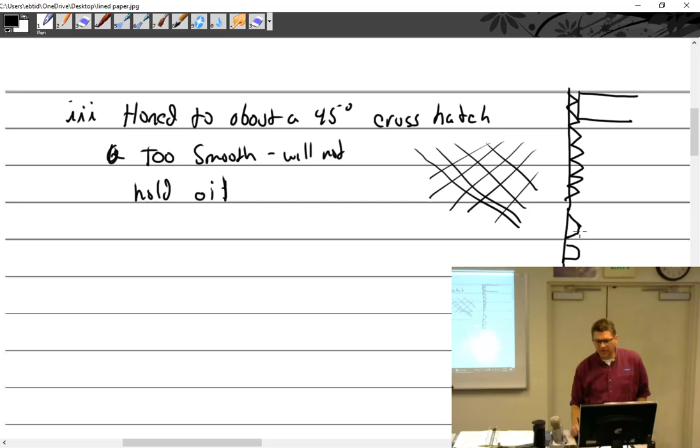That little cross-hatching is going to hold oil. And it holds just enough oil. But if you don't have a good break-in, the oil actually comes out and creates a film over everything, and then the ring just rides up and down on this super slick film of coked oil, and you don't get seating.

Then it becomes too smooth, and it doesn't want to hold any oil, or oil can get through, so you start burning oil and having problems.

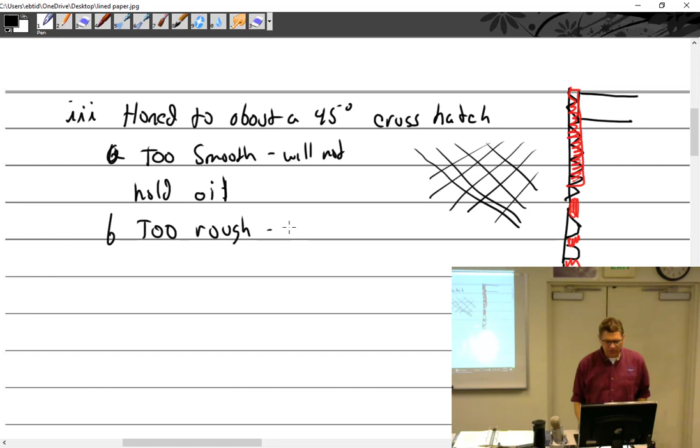If it is too rough, so if too smooth is bad, how about too rough? Is rough good? No, it causes extra wear, causes excessive wear, and that's bad.

I don't know why this is a 4, cylinder.

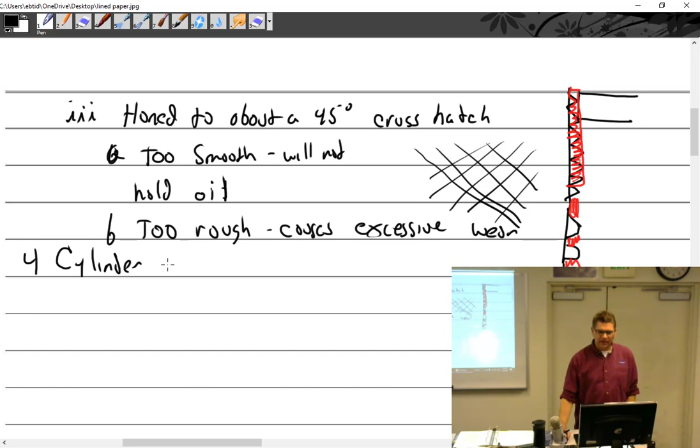It's kind of interesting that a lot of you really have read, which is impressive, and I can't say enough about this class. That other class, they suck compared to you guys. Tell them I said that. No, they were a good class too, they made all the engines nice and pretty and actually in pretty good shape. But you guys are the class that really reads a lot and is well prepared.

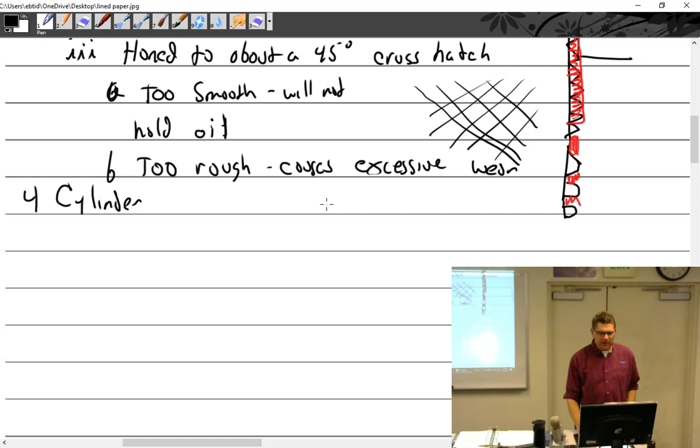If you read about where to measure these cylinders, according to Lycoming, we'll look at the bore upside down, here's the skirt coming down. Where am I supposed to actually be measuring? What does it say in there? It says to measure it about 4 inches down.

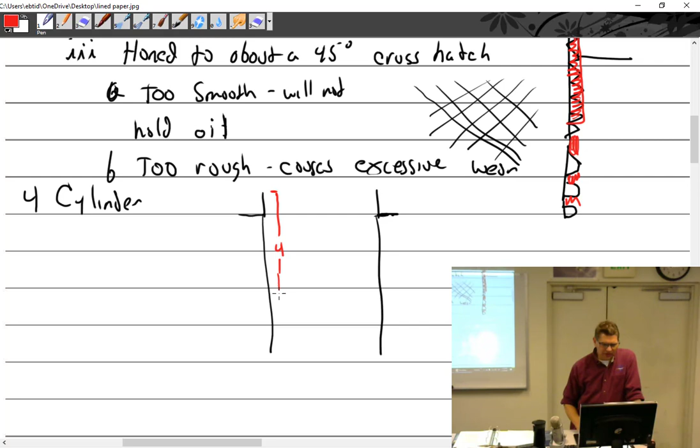Okay, and then you're supposed to measure the choke 2 inches up. Let's make this more realistic, since it's more like this. So 4 inches down, that's about 4 inches, and it says to measure this 2 inches. Now, from here to here is about 6 1/8 inch, so that means 2 inches up would be right about here. Yeah, so there's 2 inches.

So do you really think that you want to measure 4 inches down to this spot and 2 inches up to this spot? Okay, that doesn't sound right. I mean, that's what the book says, so I just got to tell you, you got to do what the book says. But in reality...

I like to take my initial measurement right here, and then compare that with, okay, 4 inches down is fine, but you have the bore gauge now, right? You know how to use it, and you can see how quick it is. So I like to take measurements right about here, and then another 4 inches down, so I can get a good view of what my bore looks like.

Okay, there's nothing wrong with taking extra measurements at all. You're never gonna get in trouble with 'well, I thought you were only supposed to go 4 down, what do you mean you got extra measurements, you're extra careful, we can't have any of that.' No, you can do that all day long.

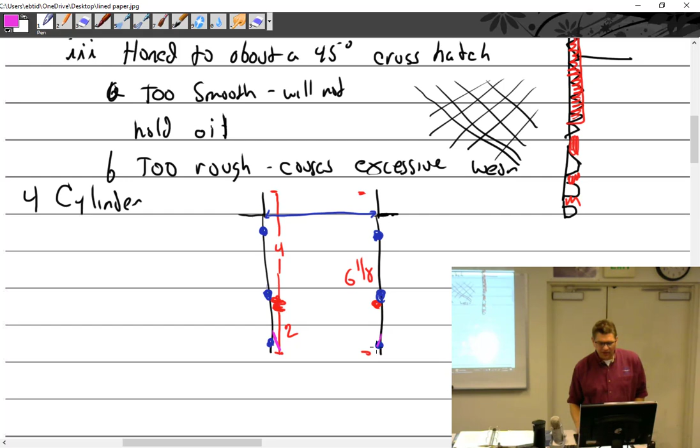So number 1, I've got my measurement up here where I like to see it. 2, I've got this measurement here, which is really about 4 inches down anyway. And then I take my choke measurements right down here, because when it chokes, too much stuff on here, it really chokes down here at the last little bit. It doesn't do me any good to try and measure choke above that. I want to measure my choke where it's really choking down.

And the reason why I really understand this is, I told you about my really cool hone machine. I wish I could even find a picture online, but I can't find one.

In order to hone cylinders, we had this thing called a sine bar. It was really just a piece of steel, about yay big, and we would literally pull it out of the machine and change it out for whatever cylinder it was. They were labeled, like this one is for a Lycoming, and it would have the choke, a 10,000ths choke, or Lycoming 4,000ths choke.

So when you held up the sine bar, it was really just a profile of exactly what the cylinder looked like, but exaggerated. There was this little wheel that would follow it on the machine and adjust the pressure, so you could get a great representation of what the cylinder looked like. These sine bars were absolutely straight until the last little bit, when they would pop in, so they'd look just like this.

They had a little hook on it, where they went in the machine. So the wheel for the machine would roll up and down this, and when it got to this spot right here, it would release the pressure on the stones that were honing it, so it would choke it in. It's okay if you don't understand that.

But my point is, I want to measure down here, I want to measure this part right here. I want to know, for the same reason, what that choke is, because I don't want to be surprised that it was choked too much. The wear sometimes comes right down here at the last little bit and really gets a lot of wear right here. So if I'm measuring above the major wear part, I have no idea what's going on.

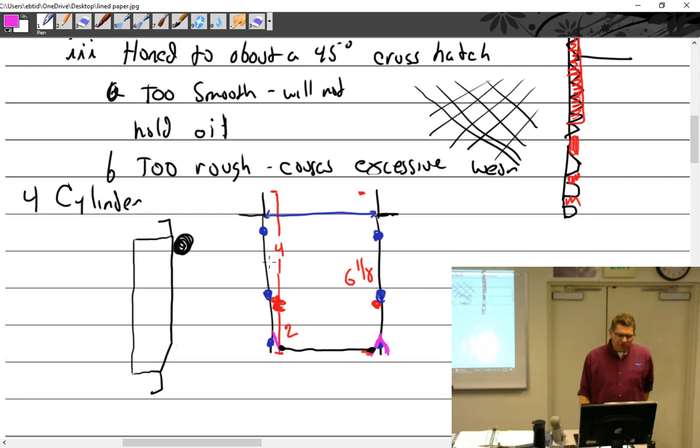It really wears a lot, that last little half of an inch. And this bore thing is critical. You want to hear a story? You gonna be okay with this, MJ?

Yeah, okay. So there's different machines and how they bore cylinders over. Some of them have a rotating wheel, like a grinder wheel that goes in a machine and kind of goes around and rotates. The way our machine worked is you put it on, you do one at a time, and it had a head that was just the same size as the piston that would go in there.

We had to change out the heads depending on the job. It had 6 stones, 6 to 8 stones that would go all the way around the perimeter, and this ram would come up and press the stones out. The stones are only about that big around, they weren't real big stones. So the machine would go up and down and spin and put the crosshatch.

To hone it out, you just let it run longer. It wasn't like I would program the machine and say I want to go 10 over. I would simply set it, and you'd have a counter on it, so you could set it for like 100 strokes or 50 strokes. It would run through all of its strokes, and you'd take it off and measure it, see where you are, put it back on, do some more. Maybe I go 400, 500, 600 strokes, but I do 100 at a time and check it, because if you overbore it, you just throw it away and get another one.

That's bad. So the procedure was, now when you're boring it, it's going to get warm, right? And what happens when the cylinder gets warm? It expands everywhere, and it expands at the head even more. So you really want to keep this profile right. That was the procedure, and my procedure was very simple, because of the story I'm going to tell you.

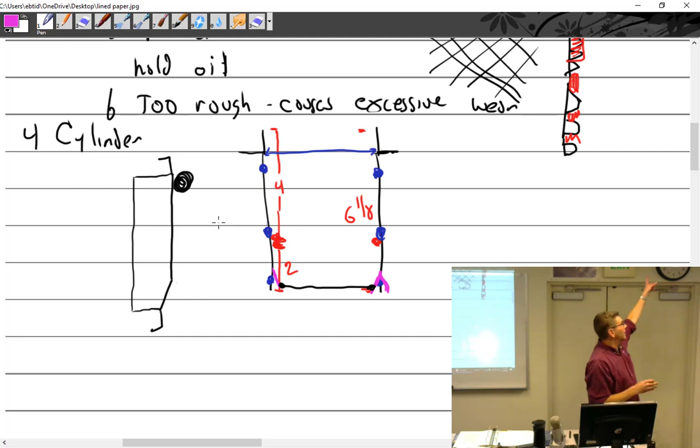So the pilot has smoke on. And it's non-controlled, we don't have a radio, we can't tell him he's got to do an emergency landing. He was heading to executive. He made it - I'll just tell you, he made it. So we're just watching the smoke, and Clarksburg is inside the Class D airspace, so it's 4 or 5 miles there.

He's smoking the whole way, and we can't see him anymore, so we're on the phone right away. The pilot tells the story - new cylinders, new everything. He's watching, he goes, wow, he can see these temperatures just spiking, and it freaks him out. He didn't want to come in and land on the grass runway again, so he's making it towards - you know what this is by chance? I don't remember who it is anymore.

So he's headed toward executive, and he called in an emergency. They gave him a straight-in approach. It's not that far. As he's getting close, he said all the temperatures just spiked out, and the power is going away. The engine's seizing up on him. So he landed, and they towed it in.

The next morning, I went with that mechanic to take the engine apart. The way we had to take it apart was just brutal. We'd have to find a cylinder near bottom dead center, undo all the cylinders, and both of us would pull on the prop to move that cylinder off the case. Then we'd put 2x4s behind it and back the prop up, using it like a wrench to get the pistons out. It just destroyed everything.

It was just an aluminum mess. That's what 4 thousandths will do to your cylinder. That's all it was, 4 thousandths. How much is 4 thousandths? That much, it's off by that much. And it ate up that thing.

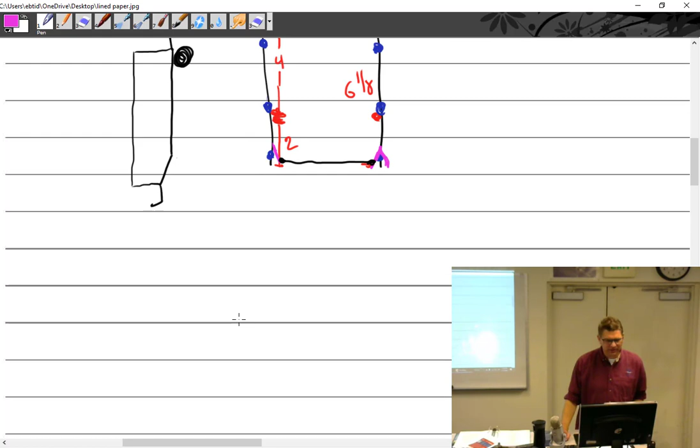So what is my point? Nobody even knows. My point was, because I wrote 'cylinder,' and I was going to write cylinder wear. Cylinder wear is most near the head, due to heat and pressure.

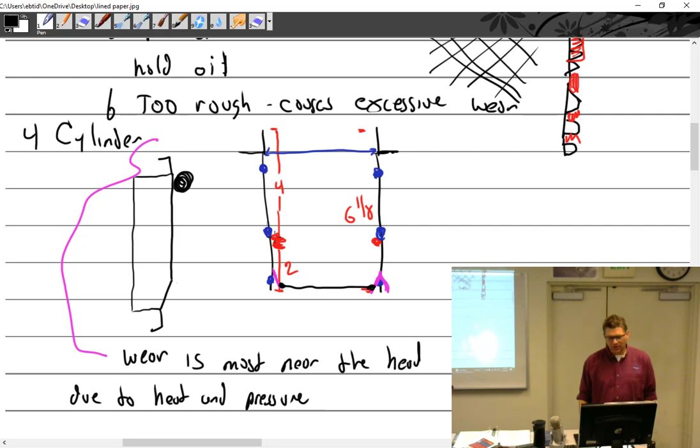So my point was, don't measure your cylinder way down here at the 2-inch mark. Measure it up here where you see the actual wear. This is a great cylinder example, and you can see where the wear is on this one. If you look, there's this little ring that's only about 3/16 of an inch down. This is real, and you can see all that wear right there.

Or you can look right there. The chrome is... actually, let me take that back. Let's look at it this way. You have a line of chrome that's about 3/16, and then right on the other side, the chrome has worn out. So right here and right over here, you can see there's not even any chrome. If you run your finger down it, you're going to feel it right about here. In fact, if you look, there's no more cracks there — all the cracks have been worn through.

So now I'm going to pass it out again. You look at that — that's where you should be measuring.

Steve's going to wipe my red pen off.

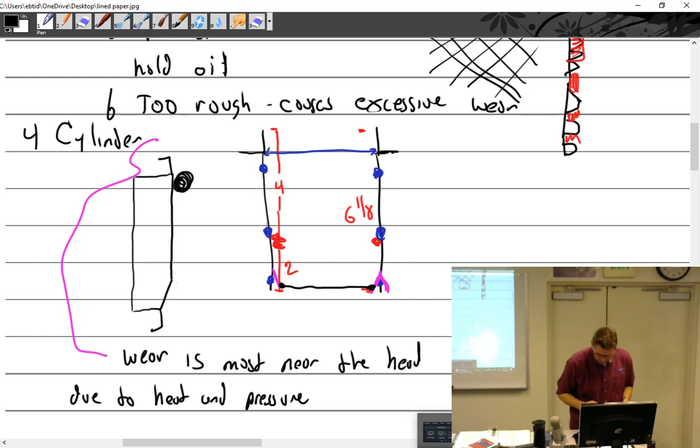So if I were going to be measuring this, I would want to measure right where my little red dots are. Exactly, right up here for the camera.

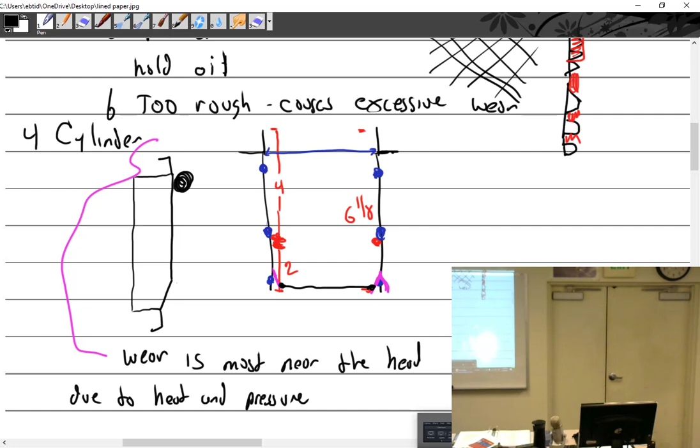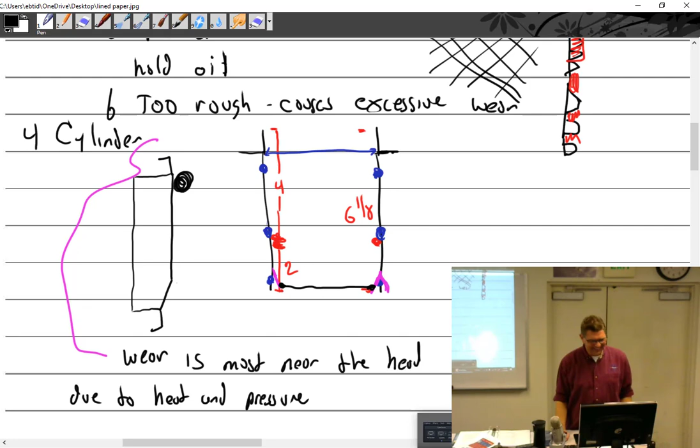See that, Katie? No. So anyway, that's what we do. Want to hear a funny Katie story? She's going to listen. She says, well, I got to go listen to one of Dad's sermons. She calls them my sermons. I love you, Kate. Did you make her walk home? It's a long walk. Yeah, oh, it's not that far. I'll pick her up in a couple miles.

Not that mean. All right, so we talked a lot about the cylinder barrel, right? That's the combustion chamber and all that. And you can take a look. How is the head and the barrel put together? Screwed. They're just screwed on.

One of the things I was taught, the first thing you do when you get a cylinder, right before you put it in the oven, is we would take a punch and punch a little notch in the head and a little notch in one of the fins on the barrel, because when you heat the cylinder up to where we're heating it, they'll twist. And if you twist that, that's not a good thing.

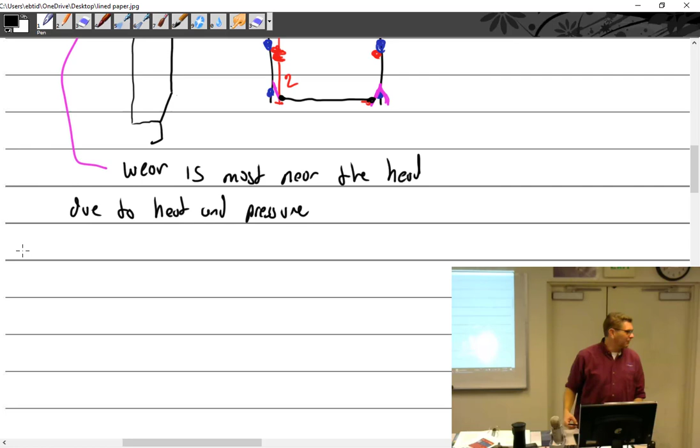You want them back the way they were, because think about it. Suddenly the head is going this way, then you got to get different push rods, and you have to get the angle. That's hard to do. Two-piece with a bearing in the middle.

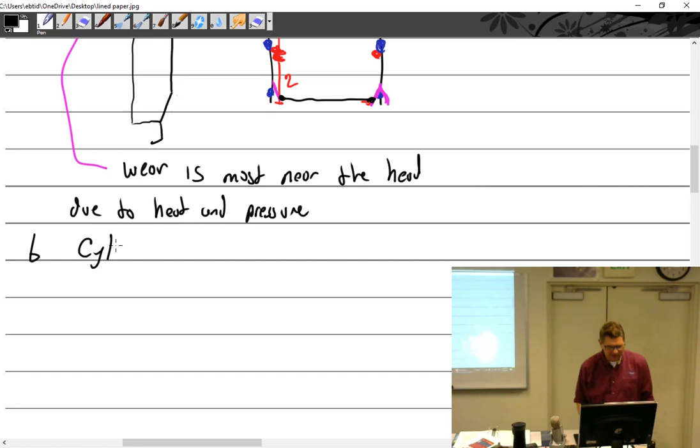Yeah, all right, so we're talking about the cylinder head. And why it's B, I don't know, just go with it. All right, so it's made of aluminum alloy.

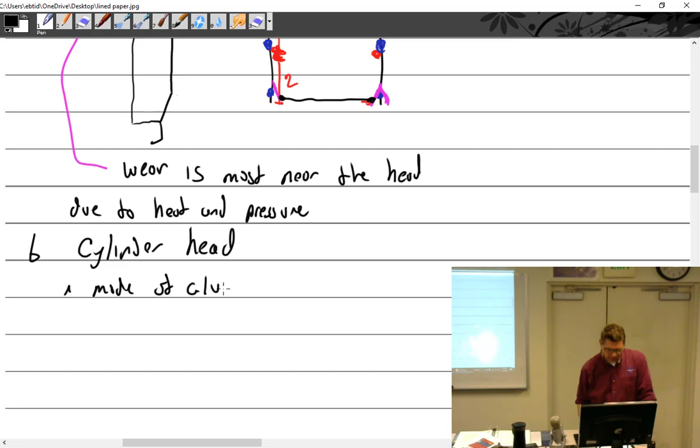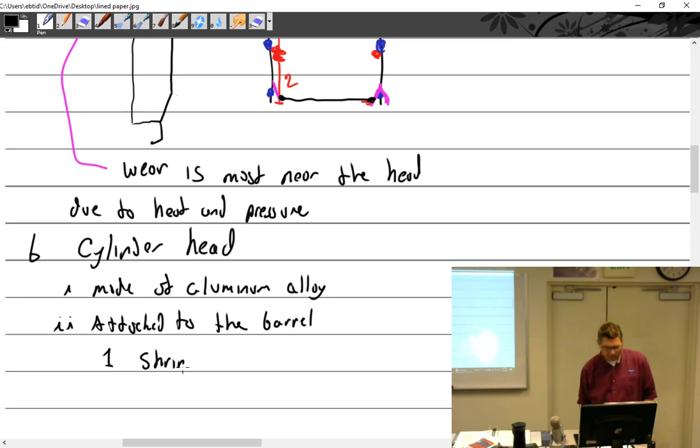It is attached to the barrel, and is done with one. It is shrink fit. What does shrink fit mean? One is heated up, one is cooled. So you put one in the oven and one in the freezer.

And you got to do it right, or they'll go together wrong. So which one goes in the oven, which one goes in the freezer? The inner goes in the freezer, the outer goes in the oven. Yes, the barrel goes in the freezer so it shrinks, the head goes in the oven so it expands. You put the two together, screw it together, and then when they both reach the same temperature, they're theoretically pretty well locked in place.

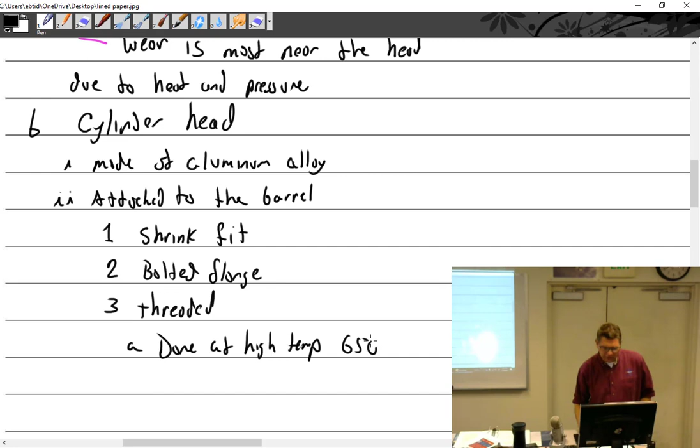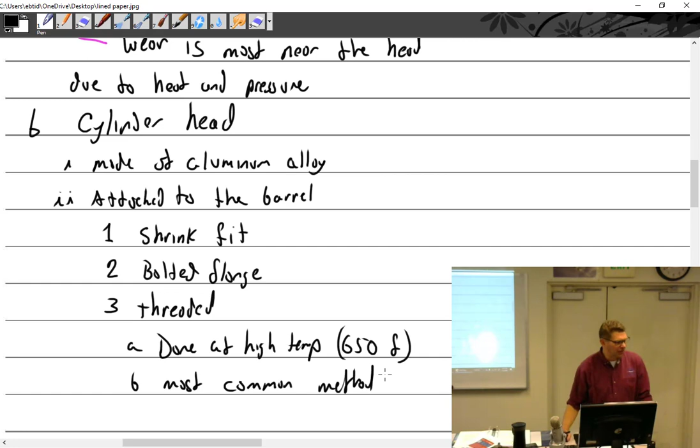Some shrink fit, some of them do have a bolted flange, not very many. Some radials, old-timey engines, are threaded. Done at high temp, 650 degrees is the number I have. And this is the most common, the threaded shrink fit.

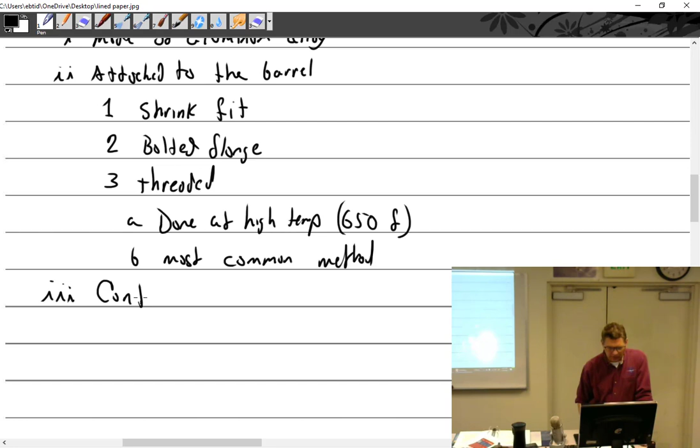Well, the head up there contains a whole lot of stuff that we have to talk about. Would you ever just change the barrel? Never, no, we were not certified to do that. Oh, okay, so you would think you could, and it would make sense, but you have to send it to some place, like I sent a lot of stuff to Gibson Cylinders. They're still in business, he's a good guy, I like talking with that guy. They specialize in doing the kind of stuff to cylinders that a lot of places don't.

Weld repair, so if the head is cracked, I think they'd unscrew them and go in, because it's too hard to weld. They would grind out the crack, re-weld, heat treat, screw it back together. And I think when you chrome plate, you have to separate the barrel to chrome plate it, you can't leave it together. So places like Gibson would do all that.

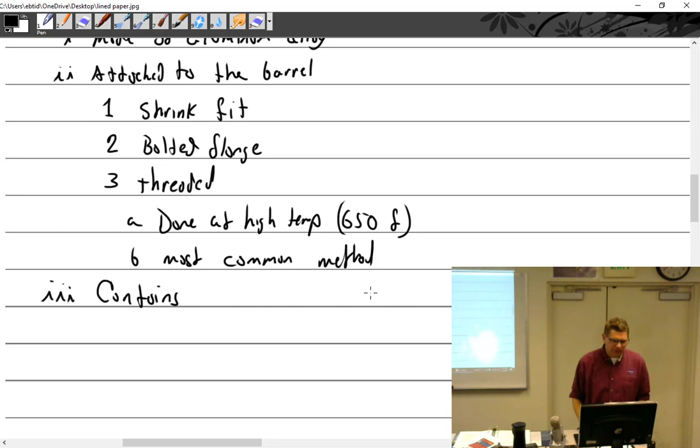How does one get a license to do that from the manufacturer? No, not at all, from the FAA. The manufacturer's not excited about you doing that, they don't like that, because they want to do it themselves, they want you to buy the new cylinders. So no, you go to the FAA and write policies and stuff like that.

Just like I told you, we could reface rocker arms, right? That's not an approved method, so how did I do it? You get engineering data, write a procedures manual, go to the FAA, and say I want to do this. They may have their engineer double check your engineering stuff and it goes through the chain. The engineer comes back and says that's not going to be a detriment to anybody, and so the FAA will stamp that procedure. Now you're legal to do it.

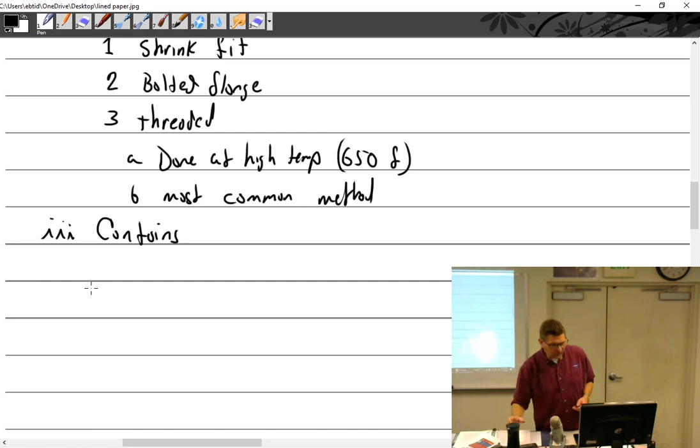So what happens if you approve it, the FAA approves it, it's put into service, and then there's a death? You're liable. But let's be realistic, in the real world the family is going to sue the engine manufacturer, the shop that did it, and the FAA for approving it. Gotta find the deep pockets. That's just the world we live in.

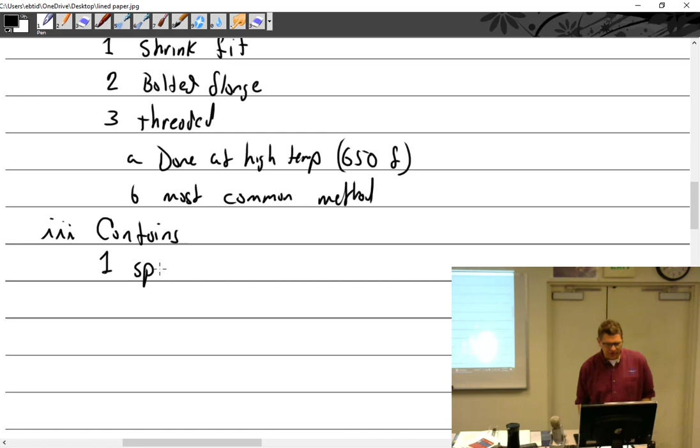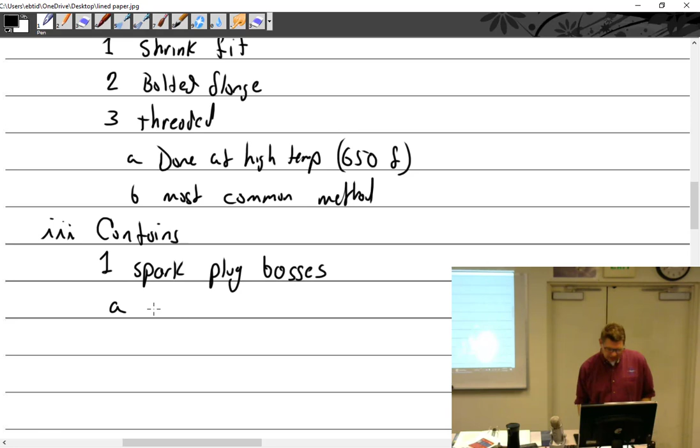What does it contain? It contains spark plug bosses. A boss is like a hole in something. They're either going to be 14 millimeter or 18 millimeter. Why in the heck is everything in the world not metric until we get to spark plugs?

Was it the Japanese? No, because NGK and all that, we'd have to go back to World War II, and I don't think we were buying a lot of spark plugs from Japan then. What, back to World War One? And who were we buying from? Europeans, right? The French? Did they come out? That would make sense.

I'm not sure exactly who it was, but in all actuality, we were making spark plugs, but we weren't very good at it. If you read a lot of history, it was kind of like, my grandfather was there, it was us and the French, us and the French. That's why half the stuff on the aircraft has French names - empennage, fuselage, ailerons - that's all American now. Anyway, they were better at making spark plugs, so we started using theirs.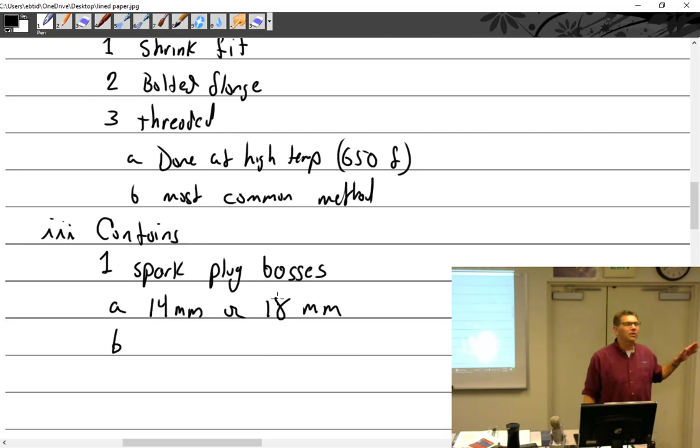I guess it was easier for us to make 14 millimeter or 18 millimeter threads than it was to get them made in a standard size. So that became the standard. Even engines as old as pre-World War II that I've worked on are still metric in that respect. That's why spark plugs are always metric. 14 millimeter is really rare.

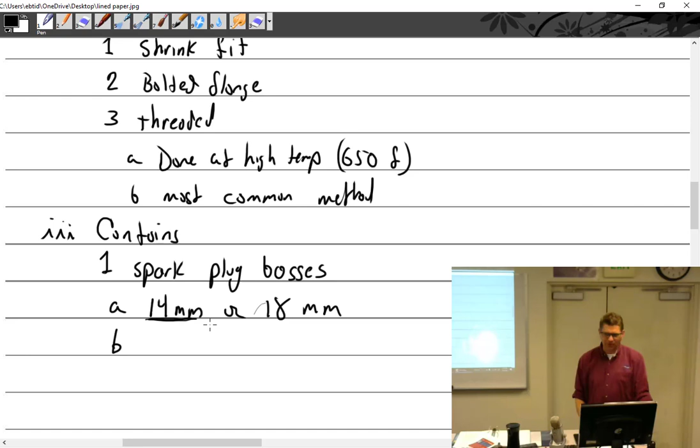They're almost all 14... so we have 18, they're big. A couple of old aircraft may have 14, but it is super rare. I don't even know if I've ever seen a 14, maybe one out there. Otherwise they're all 18 millimeter, which is pretty big.

So they're 18 millimeter, and they have a brass or bronze bushing. These bushings are kind of funny - this is in the old-timey engines, like the old Continentals. It's funny because they would do a left-hand thread and put the bushing in backwards, so you'd have to go left to tighten it. Then there'd be a big boss that they would screw that into.

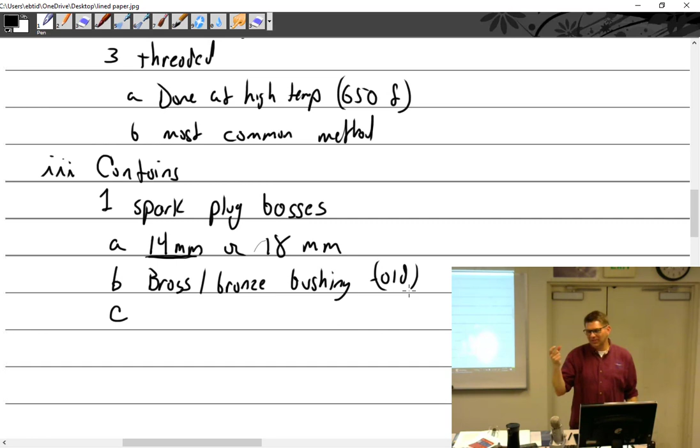Then they'd have the hole for the spark plug, and the spark plug screwed in. Sometimes the spark plug would seize up inside the bushing, and the bushing would get loose. So when you go to take out the spark plug, since it's right-hand thread, you'd take out the bushing too, and that really messed things up. So I'd have to put the bushing back in - never fun, but doable. Most of them now have helicoil inserts.

Those would be metric helicoils, right from the factory. They build the cylinder, cut the helicoil, and put the helicoil right in. There's no messing around, it's not like bare aluminum threads.

Helicoils are better than just aluminum threads. A helicoil is a stainless steel insert, so they have helicoil inserts. Sometimes these helicoil inserts get all boogered up and seize onto the spark plug, and you yank those out too. So what do you do? Put a new helicoil in - they sell them, and that's not a big deal.

What, get them at Napa? Don't get them at Napa, although it's funny - they're probably the same, but I wouldn't, because I get them from an approved source. It's not worth losing my license. Aren't they made by the Helicoil Corporation? They sure are, but when you buy helicoils for the aircraft, they're going to have a mil-spec number, which makes it an aircraft part.

So what if we go to Napa and find a helicoil set that has a mil-spec number? You still don't have an 8130. I don't know, you're pushing your luck there, really pushing the envelope. Is it done? All the time - can't tell you how many people came in for belts and they're like, yeah, they're going on an airplane.

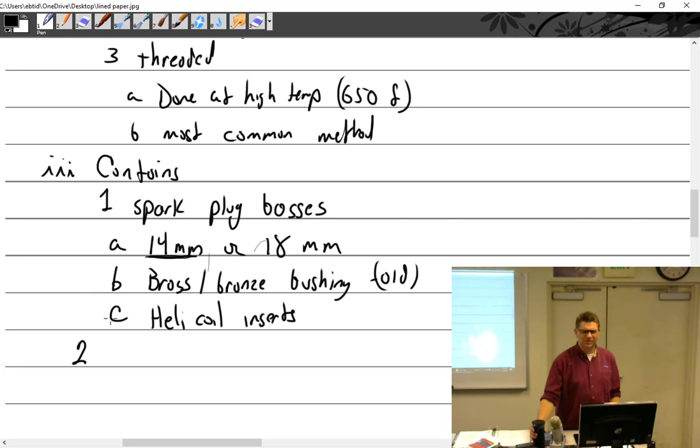I will tell you, my favorite engine is the 200 horse 360. Is that angle valve? It has the angle valve - those things are awesome. But yeah, so there you go.

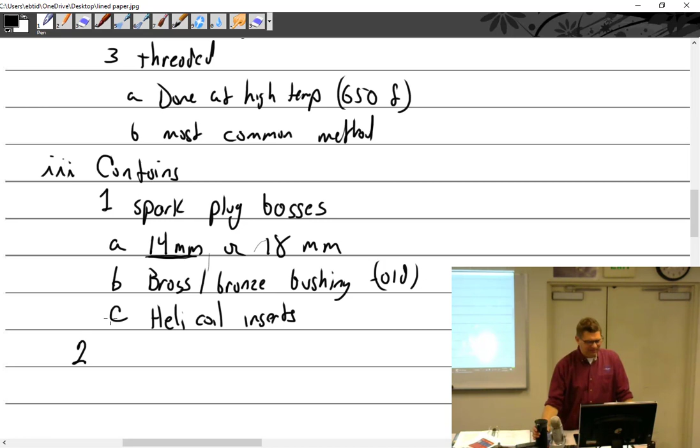It's going to be, you build a home-built, you can go and get anything you want - spark plug inserts, doesn't matter, even though it's a Lycoming, it goes on experimental. Go to the aviation section in Napa, they have it.

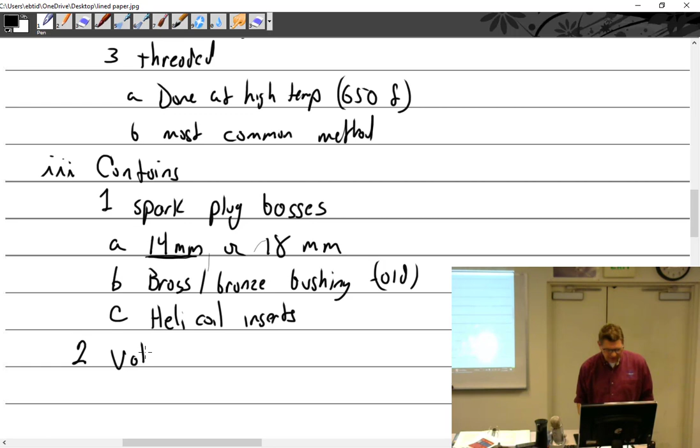So we have the spark plug boss. What else does it contain here? It has the valve guides. And now you know all about valve guides.

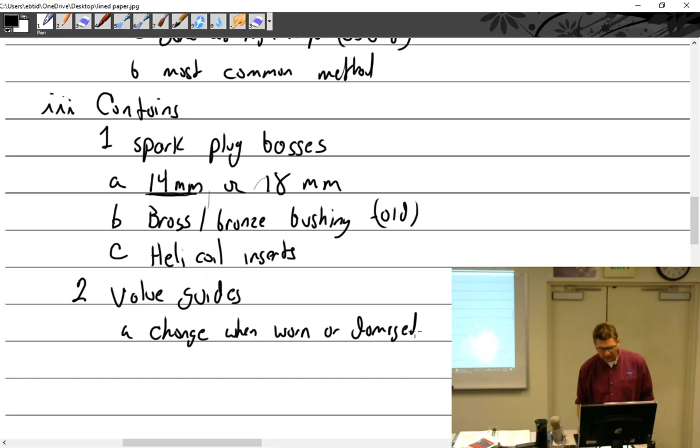And when do we change out valve guides? When worn or damaged - changed when worn or damaged. Have I ever seen a damaged one? No, I've seen them worn so bad you'd think they're damaged. So the valve seats - it has the valve seats in it.

Valve seats - when do we change those? Change when worn or damaged.

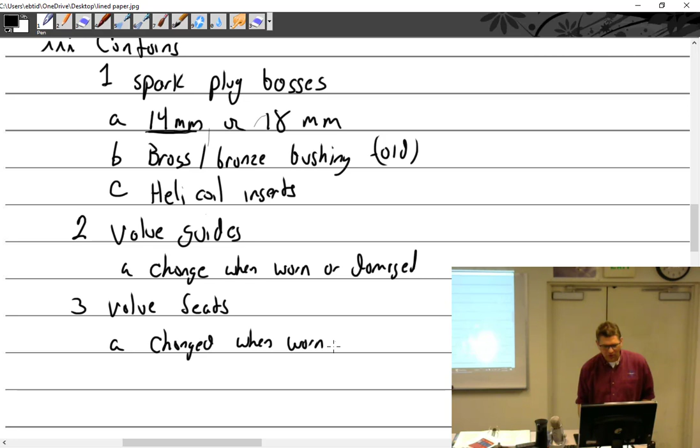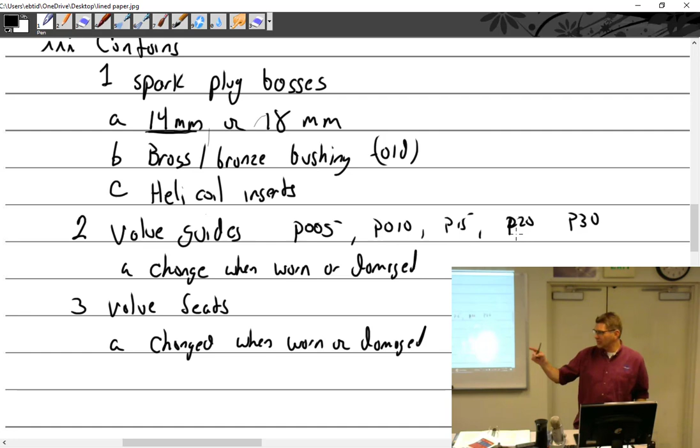So here's the thing about valve guides and valve seats - you can only change them out a couple of times. When the factory builds the engine or cylinder, they put standard size guides in. Then from there, you can go P005, which means 5,000ths over. Then you may go P10, depending on the engine - P10, P15, P20, and P30. That's all the sizes. So the valves are always bigger and bigger? No, valves are always the same. This is the outside diameter of the guide in the hole, in the cylinder.

So you pull out a guide, and you have to make the hole in the cylinder a little bit bigger, and the outside diameter of the new valve guide is a little bit bigger, and that goes in there. It was my shop's policy that every time you pulled a seat or a guide, you went to the next size over - we'd measure them, and if there was any wear, which there always was, you almost always had to go the next size over. So how many times could I change out a guide? 1, 2, 3, 4, 5 for the most part. But by the time you changed out a guide 5 times, that cylinder was pretty well worn out and cracked somewhere.

All right, so valve seats came standard - I could put standard here. They came standard, then P10, P20, P30.

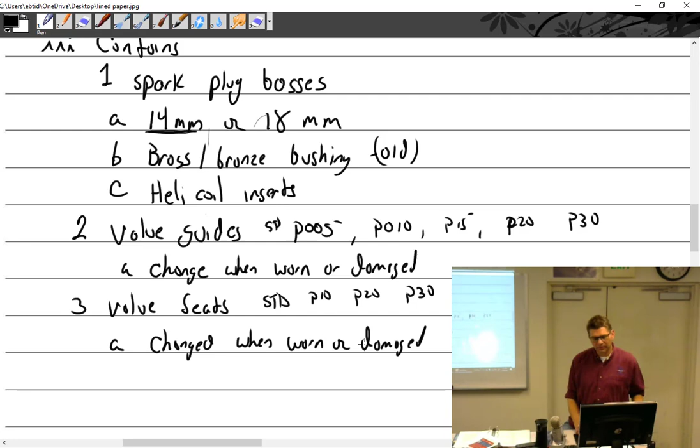Every time we pulled seats, I remilled it or machined it for the next size. So how many times can I change out seats? Three, and you're done. The only other option after that is weld repair and recut. So only change out valve seats when worn or damaged, not at overhaul.

So do you still have to grind the valve seats? Yeah, like 3-angle or 2-angle? Yeah, I'll show you. It depends on that. What else?

We have the rocker arm bosses. The rocker arm bosses have bushings in them. How often do you change out those bushings? On condition, never if I could help it. I hated doing bushings, they're just very difficult to ream all the way through, because you have to press them in, and it's hard to press all four of them in. And then you have to line bore them.

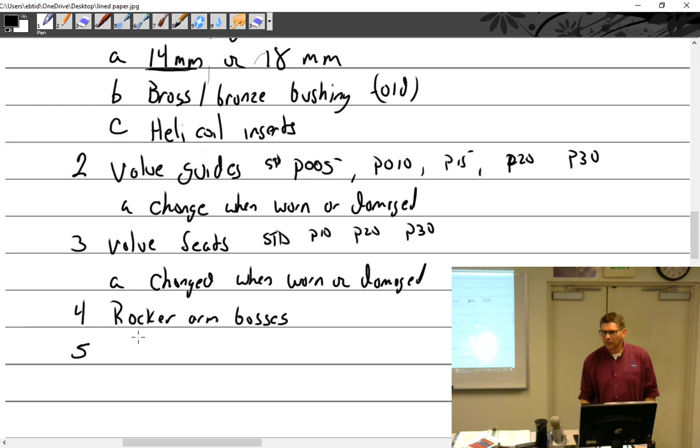So rocker arm bosses, what's that? Does the brass that you put in there bend really easily? No, not once they're in. But before installing them, is it easy to bend them? Yes. We had a tool that would hold them perfectly and then press it in.

We have the intake port. How can I identify the intake port? Fewer fins, and larger — has a larger opening.

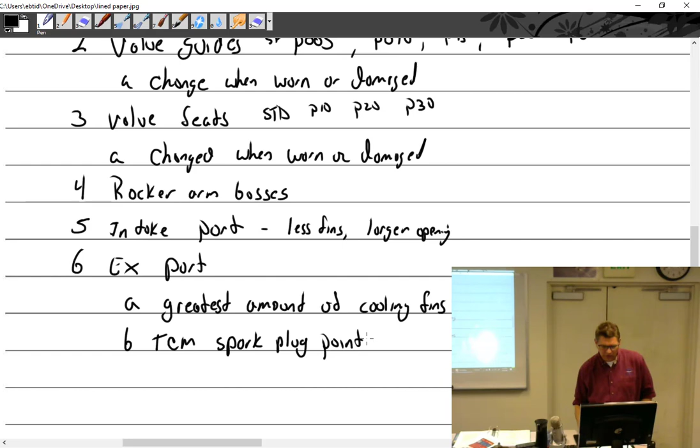And we have the exhaust port. How can I identify the exhaust port? Greatest amount of cooling fins. On Continental, I'll put TCM because I don't want to write Continental — Continental spark plug points to exhaust. It only has one that goes straight and one that goes at an angle, and that angle one points over to the exhaust side.

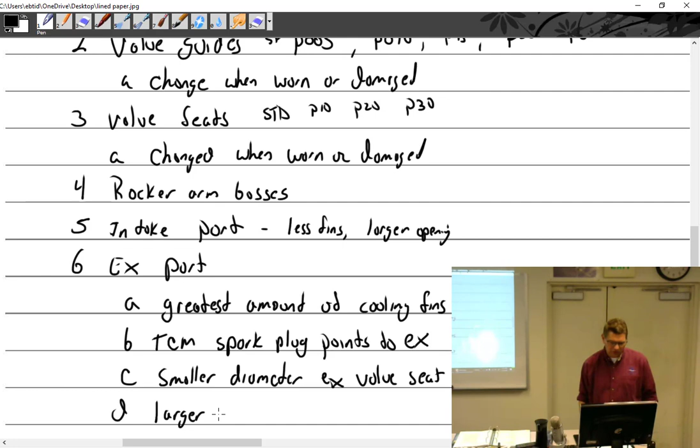On the ones that point, smaller diameter — exhaust valve seat, smaller diameter seat. If I want to put that, I could say larger diameter exhaust valve, valve stem. So if you look at the exhaust valve, it's got a much fatter stem with a very small head. And the intake is the other way around — it has a big head and a very small stem.

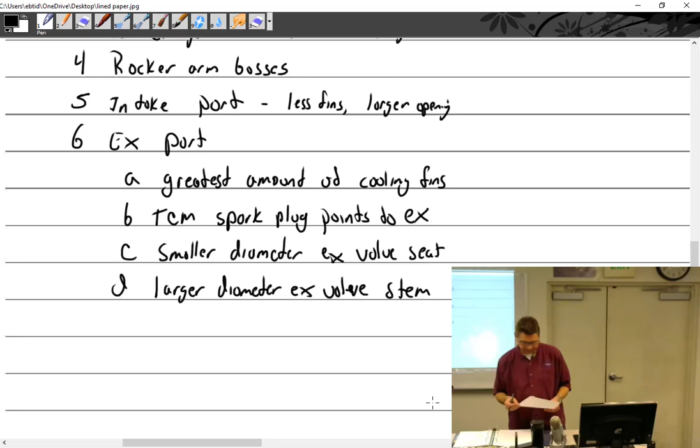And you're going to say why? I don't know, I'll tell you. Not right now. All right, let's talk about valves. I don't know why that's 6, it just is. Could be a B if you want, but I know it says 6.

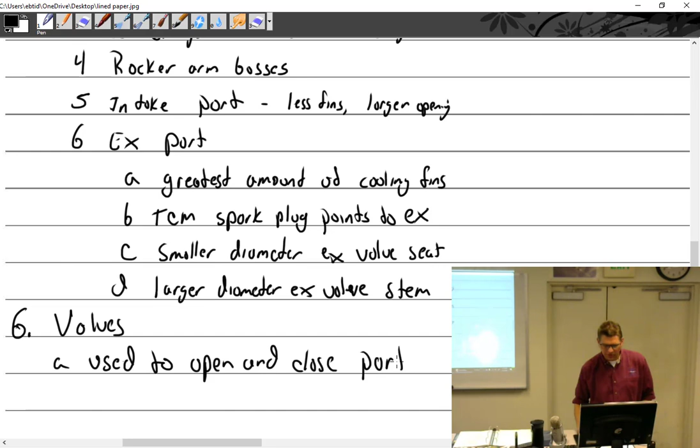6, valves. Well, what do valves do? I like that — use to, sometimes the simple works. Use to open and close. Close what? Ports. I love it, ports. Which ports? Intake and exhaust. All right, let's talk about the parts of a valve.

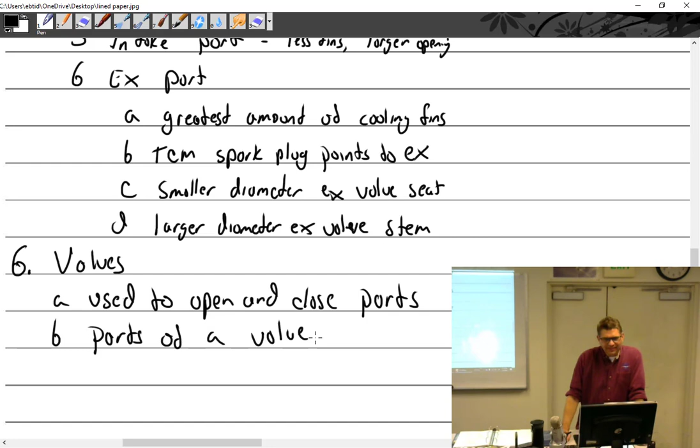Parts of a valve. What number are you writing there, Janet? I'm on A. A? Yes. Exhaust port A? Valve A. Oh, valve, oh you're aware of it. Okay, so I can go all the way up like that? Yeah, dang, okay.

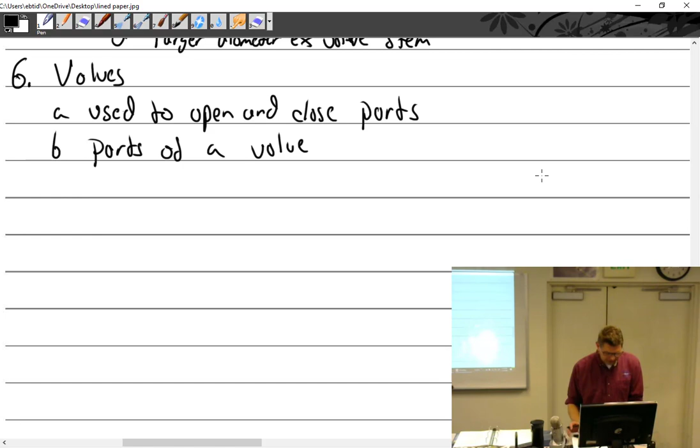All right, parts of a valve. Oh boy, you know it would be really nice if I actually had a picture of a valve and didn't have to draw one, because I'm just a great drawer. Let me see, oh well, I'll stop running by slides.

We actually have one of these in the tool room. This is a piston pin remover for your piston. So think about it — you guys are doing an overhaul, you have your engine set up like this. More often than not, if you're working in general aviation in the field, you're probably not going to be tearing an engine apart, I shouldn't say tearing apart, taking it apart. But you're going to be doing maybe a cylinder remove and replace, a cylinder R&R. So you got a bad cylinder, you take it off, send it to a cylinder shop, just put a new one on, right? You got to get the piston pin out. You guys know that if you take a hammer or a drift, even if you don't want to use the piston pin again, and start banging on it, what are you going to bend? The connecting rod, and then you get all kinds of cylinder wear. So rather than banging on it — I showed you how to use a little bit of heat, just press it right out. But if not, they make one of these piston pin removal tools. It's not bad, it's $80. I think this is from Aircraft Spruce, used on Lycoming and Continental.

And we do have one of these, but I just — the head is like ceramic or something? No, that's a piece of rubber. Oh, just rubber, it's like a piece of rubber. Yeah, but they cost $10 to make and they resell it for $80. Yep, looks like it. Big margin, gotta make them. Oh hey, there's a great picture, why didn't we look at this before? Okay.

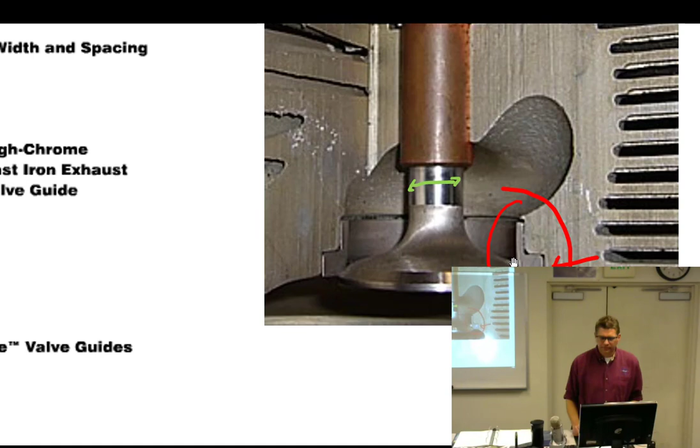Wait, so is that like a cutout? I'm kind of confused. Yes, it's a cutout. You see this right here? Yeah, it's enlarged right here, that's this right here. Okay, that makes more sense. If you attempt to do a compression test on the cylinder, it's going to read low.

I'm not talking about the cutout with the image, I'm talking about the cutout, like what you circled. Is that, like, is there a cut? It's just a cutaway. Yeah, the whole thing's been cut.

Where you circled the little L, yes, that is where the valve seat goes. They used to be a perfect circle, they cut it so you could see it. He's talking about where the actual valve seat sits. All right, I don't know. So how do you put the seats in the box? Well, I'm going to show you, that's what we do outside the class.

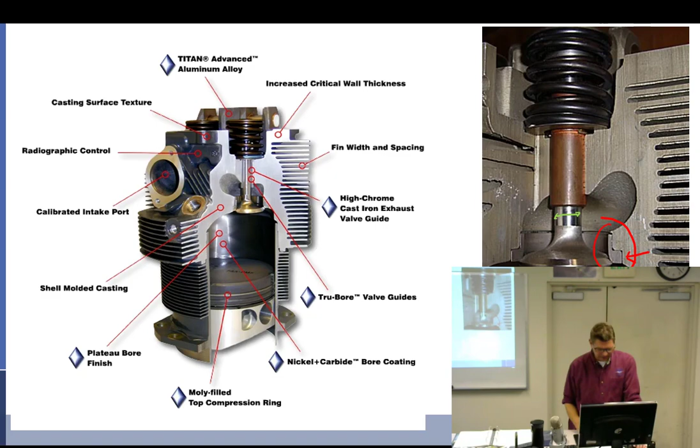So, all right, back to this. Oh wait, you guys want a break, huh? The ones that we had were just like, yeah, dang it, yeah, it's just like a straight flat. That one has the L, because that's...